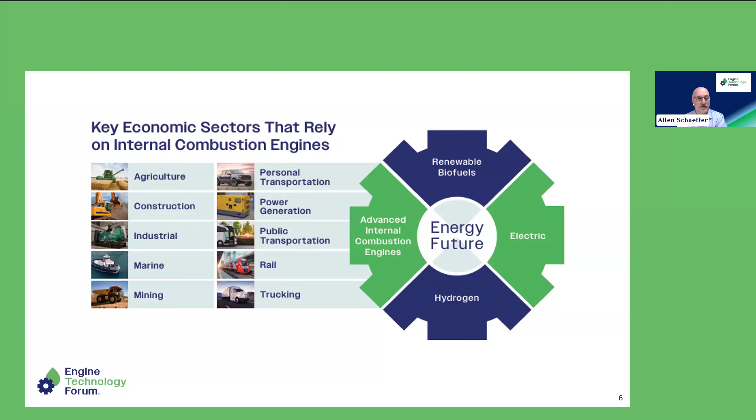And just a few opening remarks from me. I think everyone is familiar with the important role that advanced engine technology plays across the many sectors of our economy, from our personal vehicles through the heaviest sectors of the economy for trucking and marine activities, industrial and power generation. Advanced internal combustion engines really are the main power behind our economy today. As we see our energy future shaping up, they will continue to be that, but also be working with other technologies and fuels, and we'll get into some of that today here as well.

As we see it, advanced engines and renewable fuels are a sustainable solution for power and mobility, really for five basic reasons. First, the challenges facing our economy and society today are quite complex, and there's not a single solution. Our sustainable, reduced carbon future depends on a world where zero emissions technologies and internal combustion engines coexist and compete with each other to make the best possible outcome for the customers, for the users.

Continuing advancements in these engines will further improve efficiency and lower emissions, both in the on and off-road space. And we see the growing success in the use of renewable fuels like renewable diesel and biodiesel and renewable natural gas is going to continue to accelerate and expand. And finally, new internal combustion engine designs and fuels like hydrogen, for example, and e-fuels are also likely to become players in the future. All these things together contributing to a continued bright outlook for advanced engine technology.

And today we've assembled a group of experts here to talk about what does it take to deliver today's advanced engine and components, from research to concept, design, production, and beyond. This seems like a very basic concept, a very basic point of discussion, but it's one of fascination, honestly, to see what goes into producing these incredible machines that deliver so much to us.

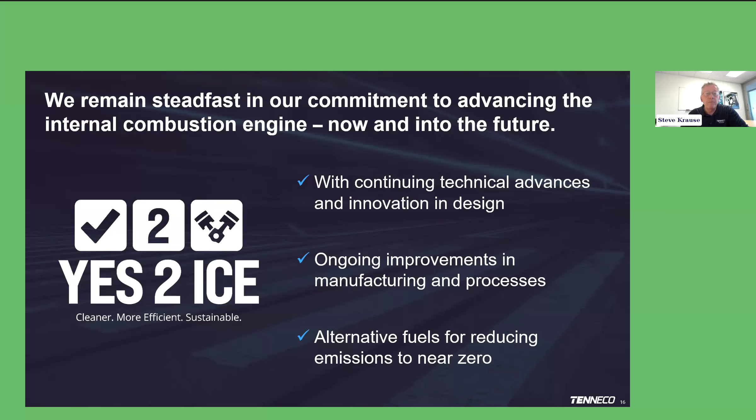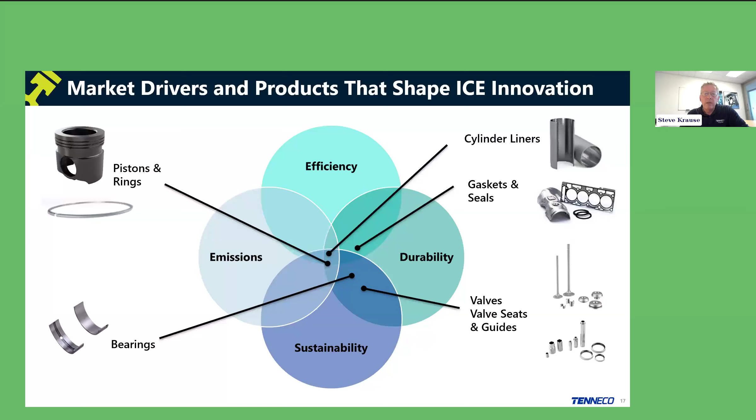Before we start talking about design, let's set it up with the market drivers and the products that shape the ICE innovation. The Venn diagram shows the complexity in the overlapping drivers, the challenges that our products are having to fit into: efficiency, durability, sustainability, and emissions.

If we unpack the drivers, we end up with an engine development roadmap. We have sustainability down through emissions, and to meet these drivers we need solutions. Those solutions are described here as the Tenneco enabling technologies, and we group it two ways: product technologies, those enabling solutions in materials, surface coatings, design innovations, but also the methodologies it takes to bring this to market, aligning market needs with engineering solutions. I included some history there to show, from 2000 to 2020, the success in industry, data from EPA and DOE, in these improvements in efficiency and fuel economy, CO2, and criteria emissions. Quite remarkable.

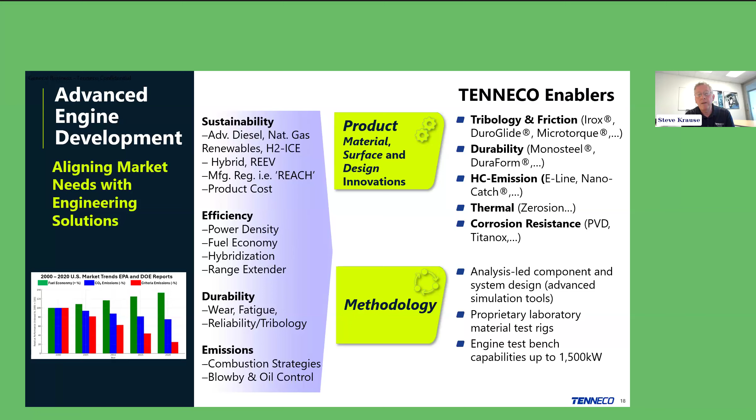The design process for engine components with Tenneco powertrain is not a linear process, it's an iterative loop driven by the marketplace and the OEM requirements. We call it holistic, and it's really grounded, the foundation of this is our analysis capabilities, which we call out here with analysis tools. They close the loop between design, testing, manufacturing, and real world use.

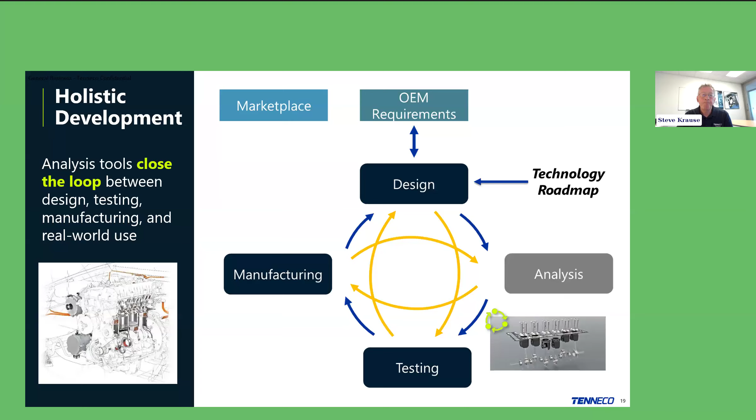So what is the value with the design? Analysis-led design to right first-time validation. In essence, it's simply cost, quality, delivery, and innovation. That's at a high level. But we break it down here, and the focus on analysis-led design within our holistic process is optimizing performance of the products, which allows us to pull ahead the process with the OEMs. Pulling ahead, they can avoid costly engine testing and time. Part of this is the in-house software development that goes with this.

This is something we started when I joined in 1998. This goes back into the early 1990s when some of these tools were started, and it's provided a lot of benefit going forward. One example would be if we look at next generation alternative fuels and what we're doing in that space right now, having this in-house developed simulation capabilities, CAE tools, has allowed us to innovate quicker and to move through that in a better way.

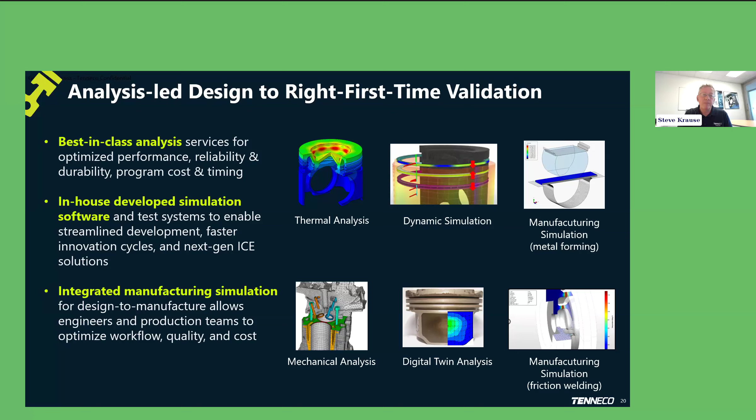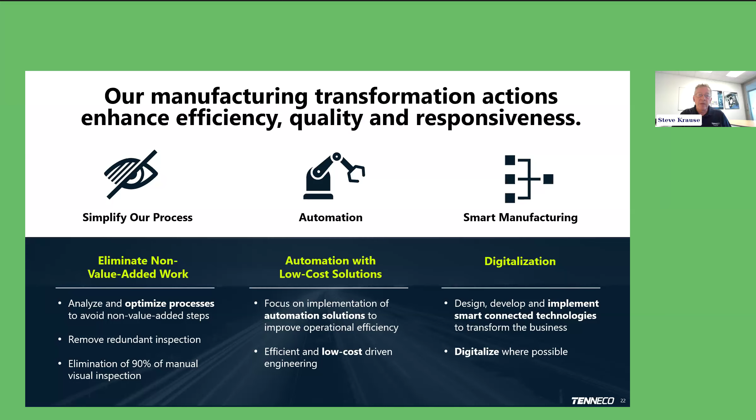So in closing, we're excited about the future of ICE. Now, ICE remains a viable propulsion option with potential to increase, particularly in what I mentioned earlier, the hard to electrify sectors, that heavy duty area, on highway, off highway. The OEMs are doing a lot of diversification. There's a range of alternative fuels and low carbon options and even zero carbon hydrogen, and also on the electrification side, where we got hybrid and range extenders. So that's exciting. Engineering excellence and components will continue to drive ICE advancements.

And the prioritization for us in powertrain engineering is to look at these OEM drivers in the diversification, and we look at alternative fuels. We have to still maintain that efficiency and fuel economy and bring those analysis tools to bear for that. At the same time, preserving cost competitiveness that's becoming more challenging and our supply chain resilience.

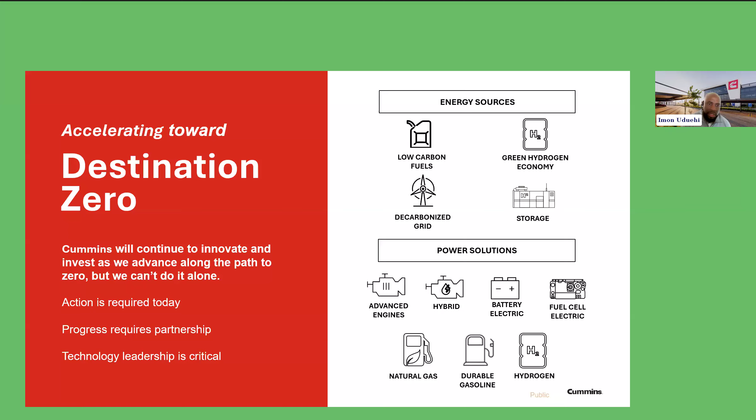If you recall from a couple slides back, we invested 1.4 billion dollars in 2024 in R&D, research and development. So in case you're wondering, our commitment is clear to evolve our power solutions. To that end, in the hydrogen space, we're not only working on H2ICE. Via our Accelera by Cummins business, we also have presence in hydrogen production and fuel cells. And through our joint venture, NPROXX, we have presence in the hydrogen storage solutions side of things.

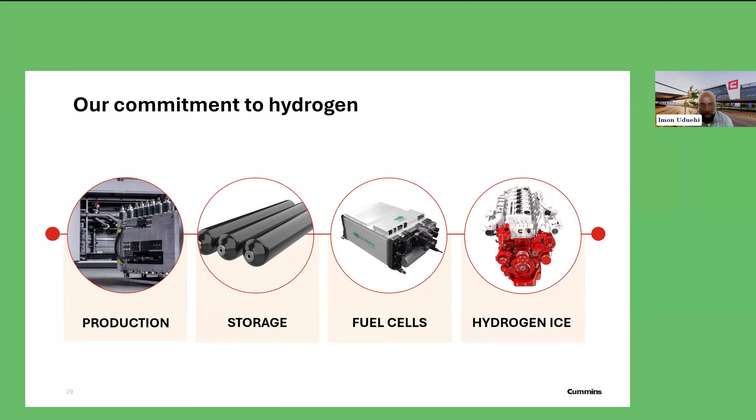May I have the next slide, please?

So I'm going to land the plane on this one real fast. A key goal here, importantly, is to give our customers the power of choice. We want to put our customers, several of whom I expect to be on this call, in control of the path they choose to take in their decarbonization journey. Next slide, please.

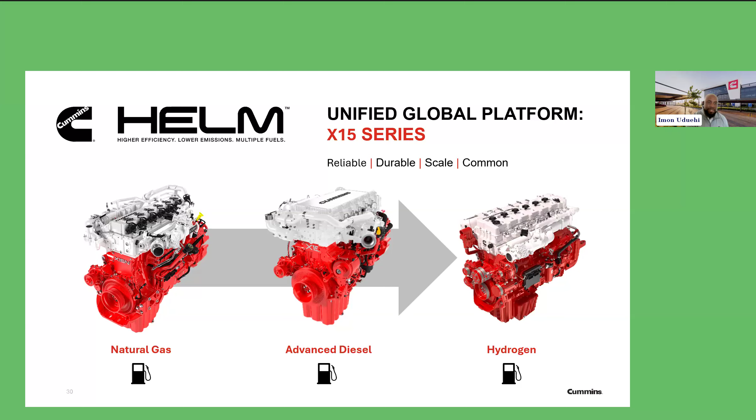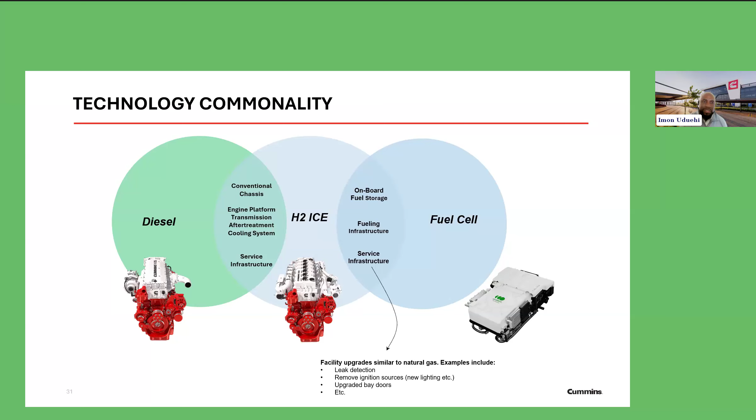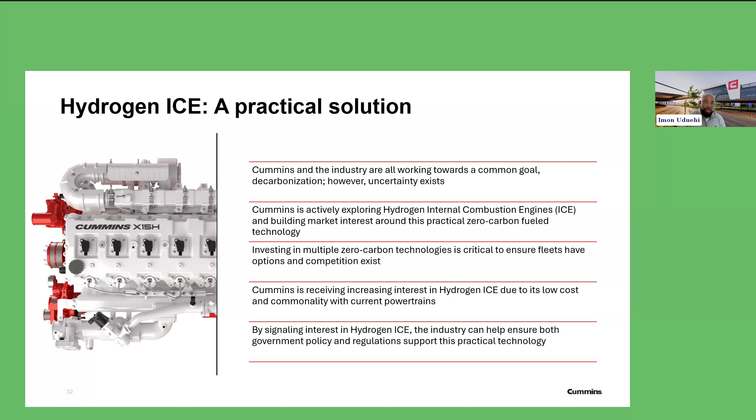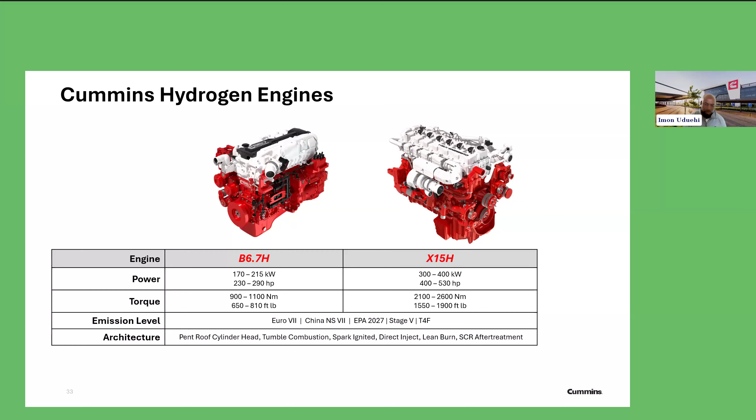Next slide, please. So I'm going to share just a few snippets now on some learnings from our production in Jamshedpur in India. But before I start, I would like to highlight our OEM partner in India, Tata Motors Limited, for being with us on this journey specific to this particular engine. Together, we have leveraged Cummins' footprint and expertise in India to support the Make in India initiative, focusing on continuing the growth of that market as a leading design and manufacturing hub.

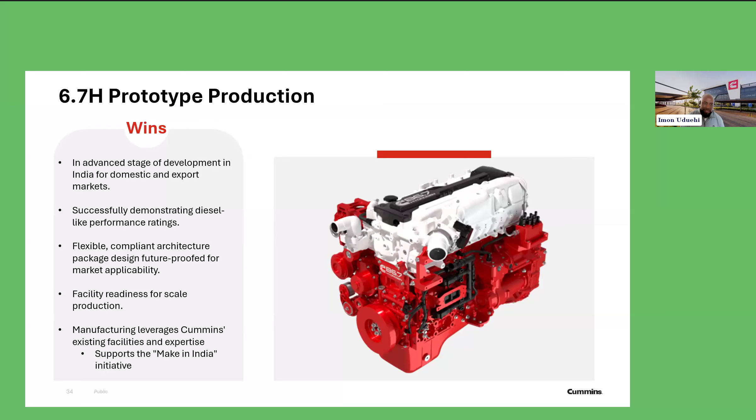I would say the same supply chain and manufacturing growth opportunities apply. But again, this is where our approach with Helm and with that common architecture has proven invaluable to get us to scale rapidly and get the customers what they need. So I'll wrap up here. In conclusion, I would say we are super excited about supporting our customers and stakeholders in their decarbonization journey, with this hydrogen internal combustion engine being a piece in our overall portfolio. Thank you.

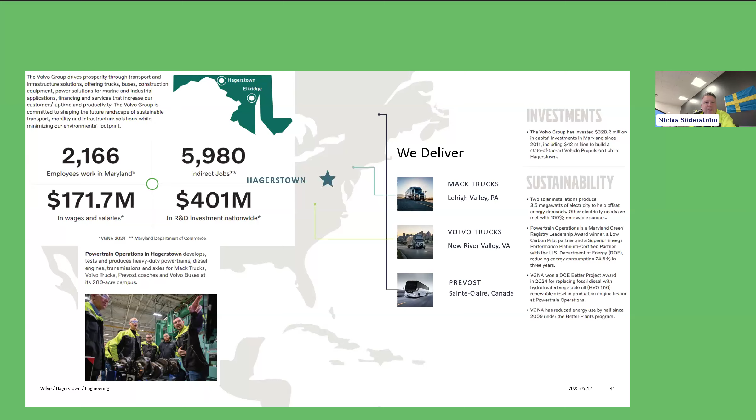Next slide. So a bit of a journey here. Mack Trucks originally started in the 60s when they moved down. Sometime in the 90s, they were part of a purchase by Renault Trucks, and roughly 10 years later or so, AB Volvo purchased Renault, and Mack became part of the Volvo Group. We started producing our Volvo engines here in 2004, and we have been transforming and adding on products ever since. So we are very much still investing here in these products for the North American market overall, both in operations, engineering, and infrastructure around us.

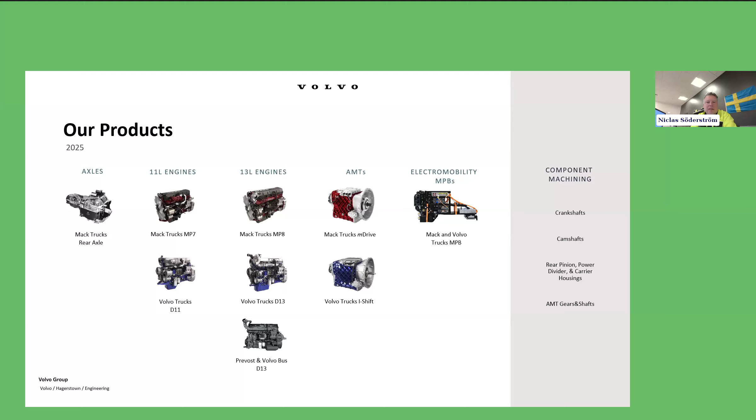It's also roughly a 4-year process for us right now. We go a little bit up and down in time, but there's always advanced technology development ongoing, so we have things ready off the shelf. When we look at the requirements for the initiation milestones, we know what we pick from our advanced technologies, and we put them into first concept selections, which is more of a sketch stage. We do a lot of virtual work nowadays to speed up this process as much as possible, but also to have as much validation and testing done before we start getting into hard components.

We follow a pattern for North America where we introduce something major more or less every 3 years. Lately, we've been a bit more frequent delivering new products because of different legislation, both EPA and CARB. So right now we are also adding on a lot of these components for our new truck ranges that were just launched, both for Mack and for Volvo.

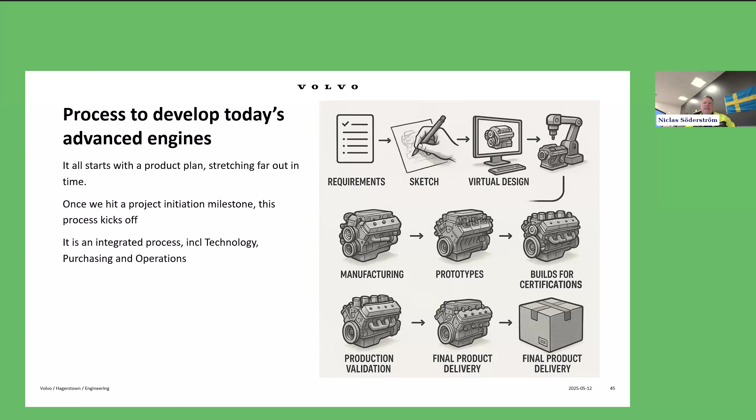As we talked about, we do all this development using different tools, processes, and methods that are out there, trying to be better, smarter, and faster so we can adapt to different needs and changes in the world. The more we can simulate and get early validation of potential concepts and ideas, the faster we can get to the next step, producing fewer physical prototypes and only building hardware where we actually get some benefit out of it.

This is also part of sustainability - we don't want to produce things that we just scrap. We go into durability and feature validation before starting the certification process, because once we go that route, we have to be more or less locked down on what it is we're going to produce, since that cycle is very long for us to meet, both for the powertrain units and the complete vehicles. If you go to the next slide.

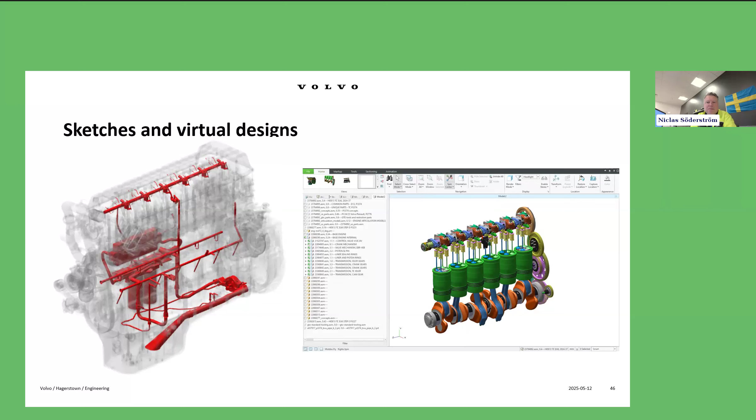With automation, we have to do more, both for the delivery area and in the process, which further drives the demand to upskill and develop our operational workforce. In some cases, rather than touching the product, they have to help the automation run and work as intended. So there's a natural progression for the workforce, growing competence and skills along the way.

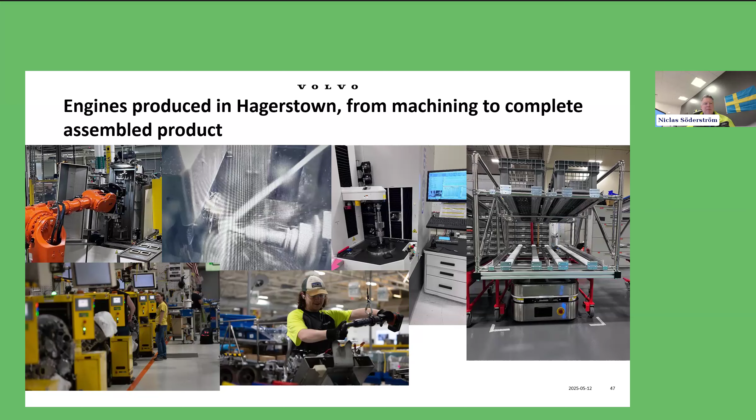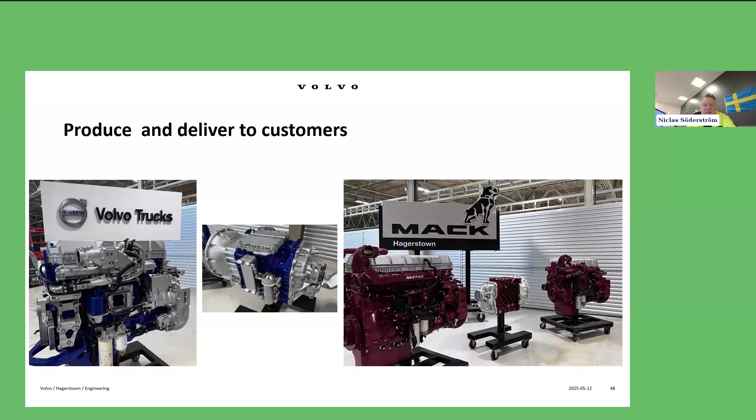And then we have more technology leaps when it comes to things like the fuels we just discussed, or how we can integrate different things in a wider system. Looking forward, we've been working with Industry 4.0 for a while. I guess AI and the big data that is coming is a further enhancement that we try to put into our products to provide more value for our end customers.

And I think that is it for me. Thank you.

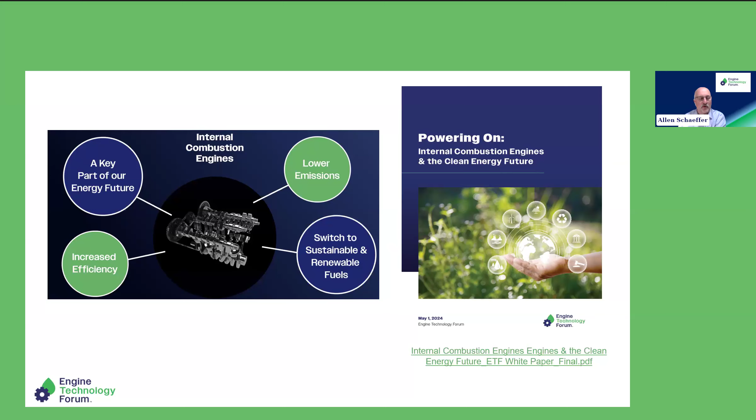From our perspective, I think you can take away from today that these manufacturers and component suppliers, vehicle manufacturers, engine manufacturers, are all producing very advanced technology. It lasts longer, it's more efficient, it's more productive, it's lower in emissions, and they're doing that also by expanding the number of fuels and options for their customers more than ever before. So it's a lot going on.

It's pretty clear as well that internal combustion engines are going to continue to be a primary source of power for many applications indefinitely, as we wait to see how other technologies fare and how legislation and regulations might drive those up or down. We have to wait and see about that, not just here in the US, but really around the globe.

In the meantime, we see the opportunity for the use of renewable fuels. They offer an important and sustainable solution for power and mobility, much more than we're using them today.

Lastly, I'll just say that we see a world of technology where we have many fuels and technologies coexisting and competing, and of course, wanting to find the best solution for each need. And so that's, I think, one of the key things that was conveyed here today.